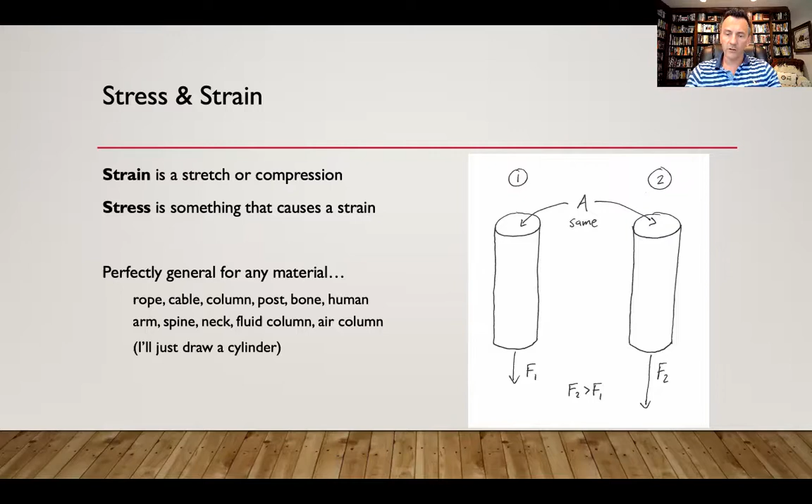So which of these ropes is going to stretch more? I think that it's pretty intuitive that rope number 2 is going to stretch more. We're pulling on it more. We're pulling harder. Therefore, it's going to stretch more. So we can interpret then that since there was more stretch, that means more strain, which must have been caused by more stress. So the more force we pull it with, the more stress we are applying.

Okay. Now, what about the areas? Let's say that now we keep the force the same on two different ropes. We're pulling equally on two different ropes, but the ropes have different cross-sectional areas. One rope is thick and one is thin. So rope 2 is the thicker one. And we pull on these two ropes with the same force. Which one's going to stretch more?

Again, I think intuitively we would agree that rope 1 would stretch more in this case because it is thinner. The thicker rope is going to be harder to stretch than the thinner rope. So if we pull on them equally, the thinner one should stretch more. So I can summarize that by saying that since rope 1 had more strain, then rope 1 must have experienced a greater stress. And so less area would lead to more stress for the same force.

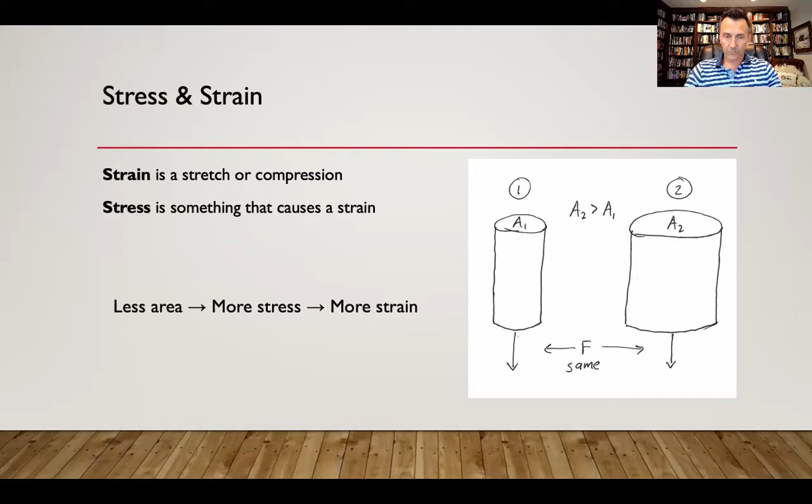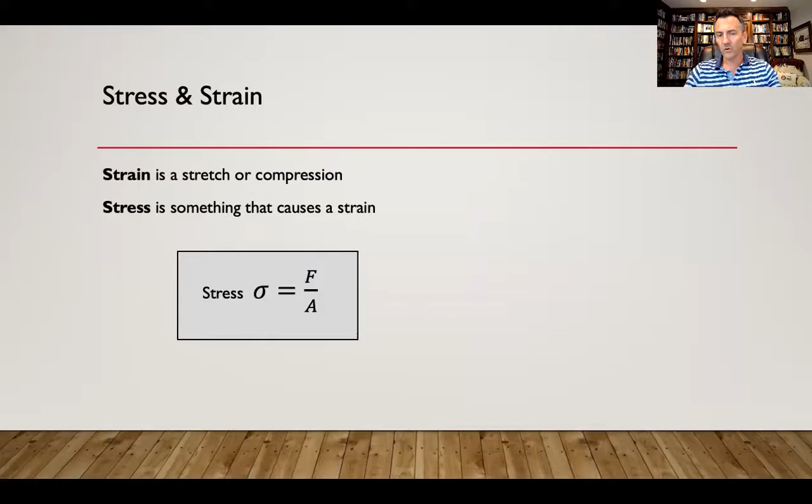So I can summarize all of that with a simple formula. Stress, which we represent with the Greek letter sigma, is force divided by area. Stress is directly proportional to force, so more force means more stress. Less force, less stress. It's inversely proportional to area because area is in the denominator, so more area makes the right-hand side smaller, which is going to make the left-hand side smaller. So more area, less stress. Less area, more stress.

And if we look at the units of this for just a second, so stress is force over area. Force could be measured in pounds, and area could be measured in square feet, for example. Or force could be in pounds and area could be in square inches. So stress would be measured in pounds per square inch or PSI. Or if we're using metric, force would be in newtons, area would be in meters squared, and a newton per meter squared is what we call a Pascal.

So you may recognize these units, Pascal and PSI. Maybe you recognize one or the other or both. And that's because these are the same units that we use for pressure. And the reason is that pressure is also defined as force per area. And so I'm going to come back to that in a minute and talk about what is the exact relationship between pressure and stress.

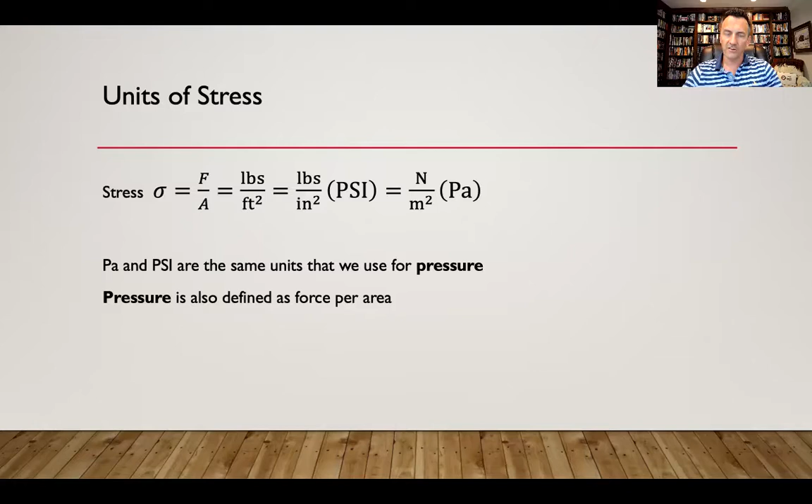Another concept that I'd like to talk about is this idea of energy density. Physics is, in my opinion, the study of energy. A lot of people think of physics as the study of force. And that's because that's the way introductory physics is usually taught. You start with force. But eventually in your physics education and physics career, you reach the point where you really think about things more in terms of energy than in terms of force. And I think that physics is the study of energy. So physicists love to talk about energy, and we're going to do that today too.

So this word density, though, let me start with that word. Density means, in our everyday language and in science, per volume, right? So when we talk about the density of an object, we're usually talking about the mass density. We're talking about how much mass per volume that object has. Something that's more dense has more mass and a smaller volume. Something that's less dense has less mass in that same volume.

We also sometimes talk about population density, and there we're talking about people per volume or people per area. And similarly, we can talk about energy density, which is energy per volume. So we're talking about how much energy is packed into a particular volume. That's the energy density. Higher energy density means more energy is packed into the volume.

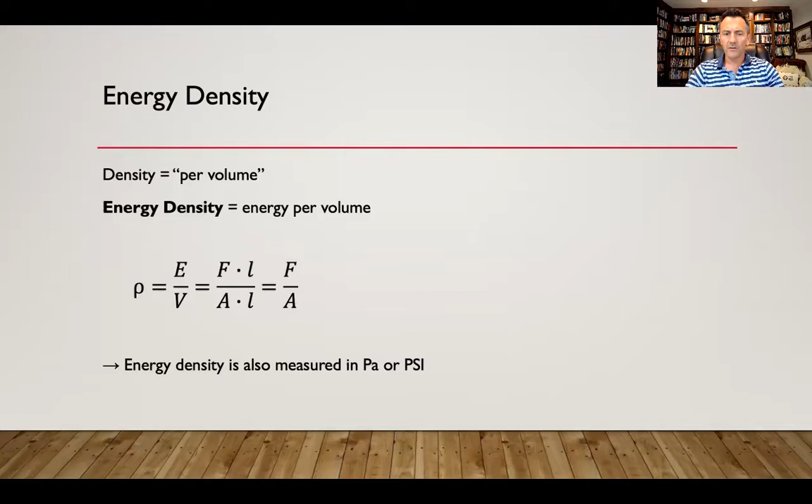Volume can be thought of as an area times a length. So I've replaced the volume with A times L. And you look at this fraction, you see that the L's cancel. And we're left with force per area, which we've seen before. So energy density is also measured in pascals or PSI.

And so what I'm getting at with all of this is that these are all different ways of expressing the same thing. Stress, pressure, energy density. Another one that physicists like is momentum flux per second. That's a little more complex. I'm not going to talk about that right now. But all four of these phrases are different ways of expressing the same thing. So the bottom line for this particular presentation is that when we talk about stress, we are talking about how much energy is packed into a volume.

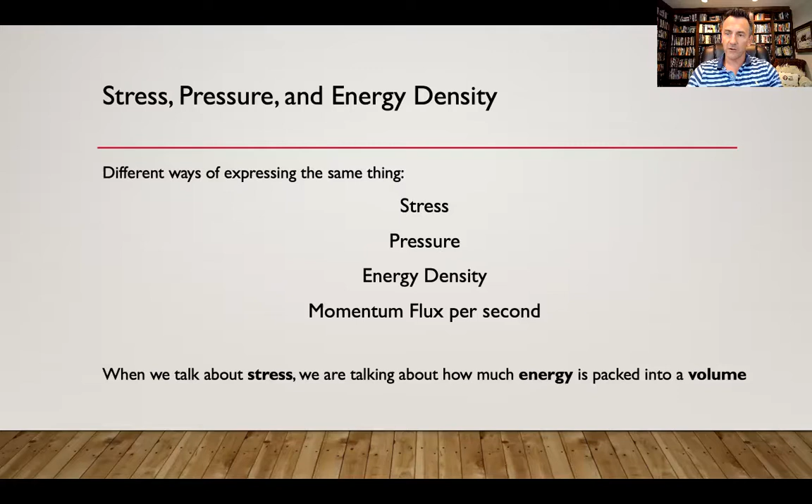So there's two types of stress. The first one is normal stress. And in this case, normal is used in the mathematical sense of the word normal, which means perpendicular. And in normal stress, the forces are perpendicular to one or more surfaces of the object. So here I've drawn the object as a cube. You'll see in a little bit why I chose a cube.

It's a very simple three-dimensional object, and we're talking about things in 3 dimensions. And also a cube serves as a nice kind of building block for more complex objects. We can think of complex objects as being composed of many small cubes all stacked together, kind of like Lego blocks. So let's focus on what happens to a single Lego block, and then we'll look at what happens to the entire object that's made out of these Lego blocks. So in the case of normal stress, we're applying forces perpendicular to the surfaces of the cube. Those could be pointing inward, which would cause the cube to get smaller, compressing the cube.

They could be pointing outward, in which case the cube would expand. That might be a case where you have, for example, a gas inside of a flexible container that's expanding. And you can possibly have both at the same time. So in my bottom right drawing there, I have that it's being compressed in the vertical direction, it's being stretched in the horizontal direction. So we have a stretch and a compression. It's kind of pancaking this thing. But these are all examples of normal stress, because the forces in all of these drawings, every force arrow is perpendicular to a surface of the cube.

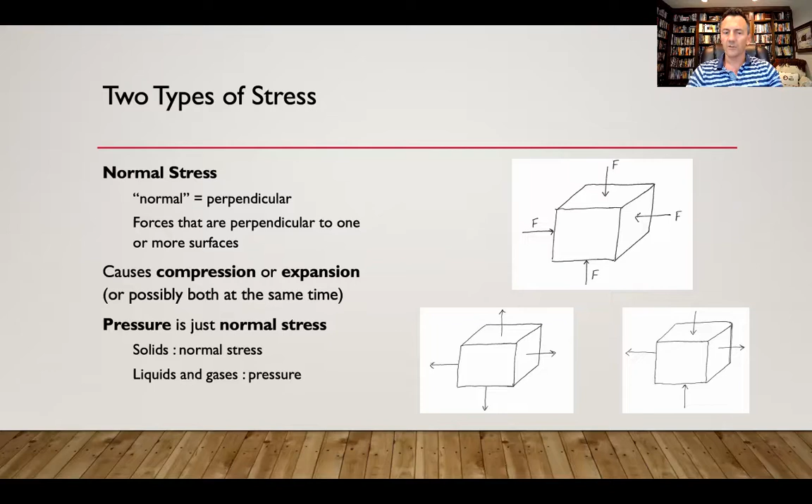And now I can tell you what the relationship is between pressure and stress. Pressure is just normal stress. They are the same thing. We use these two different terms basically to refer to two different states of matter. If we're talking about liquids and gases, we usually use the word pressure. If we're talking about solids, we usually use the word stress, normal stress. But they are basically interchangeable. And that's just convention that solids, we talk about it with one phrase, liquids and gases with another, but we can flip those two if we like. They really are the same thing, pressure and normal stress.

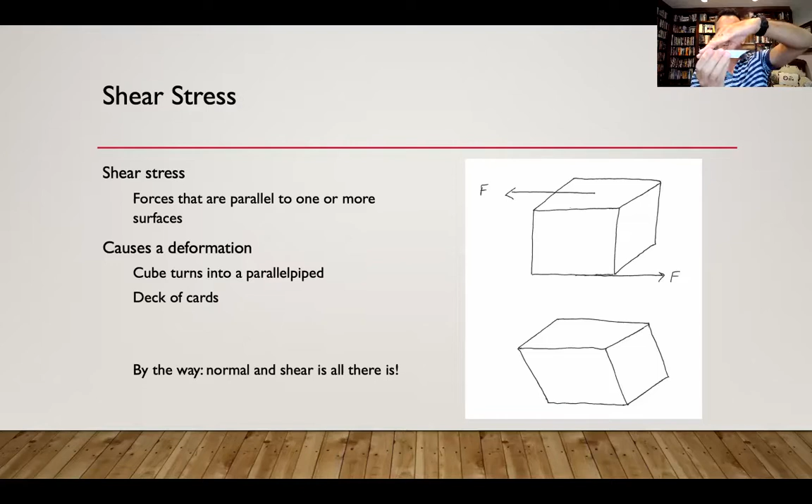So it's easy to demonstrate this with, for example, a deck of cards. So if I take a deck of cards and I apply a force sideways to the top, so parallel to this top card, and I'm going to go ahead and just kind of push them over like this, and this is what shear looks like. Okay, so we have something that's cubic or rectangular here, and we slide the top with a force. We apply a force on the top, and it's going to deform it like this.

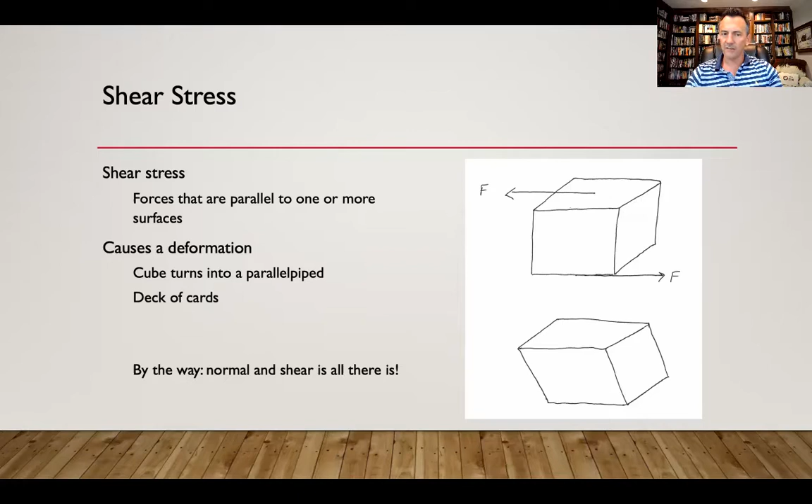Okay, so that's shear stress, and I just want to make this quick mention that normal and shear stresses are all that there is. Those are the only types of stress. And you may wonder, well, what about a force that is neither perpendicular nor parallel to a surface? Maybe it comes in at an angle. Well, that is both a shear and a normal stress. So there's a component of that stress that is going to cause it to shear, and there's also a component that's going to cause it to compress or expand. So it's both a normal and a shear. So we can think of all stresses as a combination of normal and/or shear stress.

I can also do this with a deck of cards. Again, the cards are not held together, but I can still kind of simulate this idea where I'm going to hold the bottom of the deck stationary while I turn the top of the deck. And so I'm twisting the top of the deck. And so I'm getting this torsion, this twist to the deck of cards.

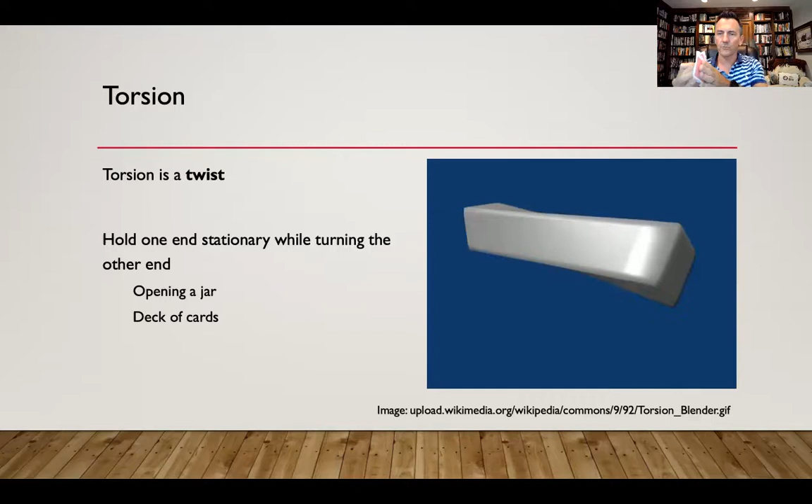So let's take a flexible cylinder and dice it up, divide it up into cubes. And so these cubes are serving as a visualization tool. We don't actually have to have a cylinder that's made of cubes. We're just doing this for purposes of understanding what's going on here. So we're using the cubes as a visualization tool. You can think of them, like I mentioned, they're like Lego blocks. These are flexible Lego blocks that have been stacked together to make up a cylinder.

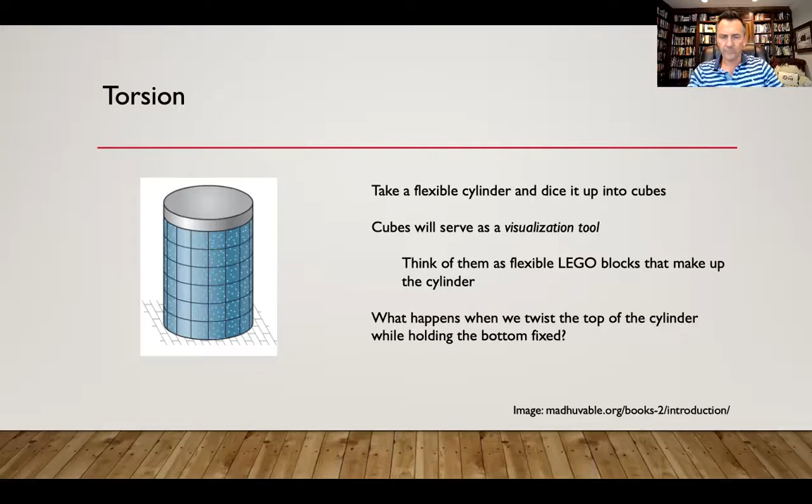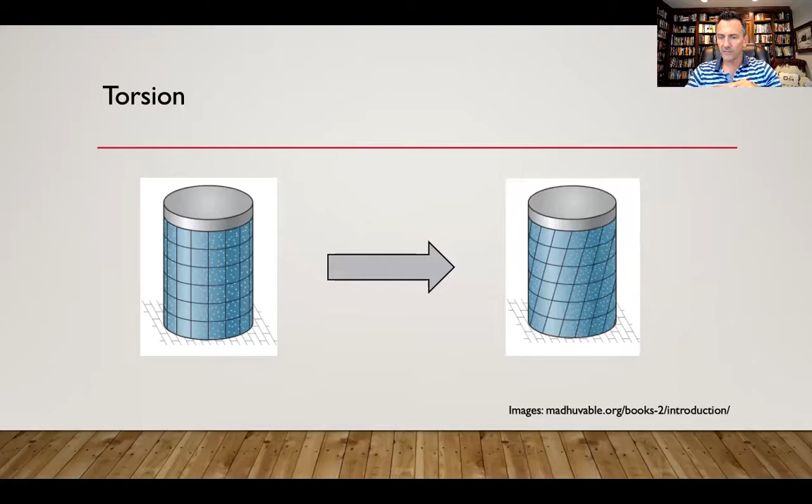So now what happens when we twist the top of the cylinder while holding the bottom fixed? Well, we get something that looks like this. And notice what's happening to the cubes. They are shearing, right? They are being deformed into parallelepipeds. So this is a shear force that this torsion is causing. So torsion causes a shear stress, and that's illustrated with these simple drawings.

To kind of summarize all of these physics concepts, when you apply a normal stress or a shear stress to an object, they can both increase the energy density within the object. And a torsion applies a shear stress. So the chain of reasoning down here is that a torsion causes a shear stress, which is another way of saying that the energy density in the object has increased. Okay, so how does this relate to the rear naked choke?

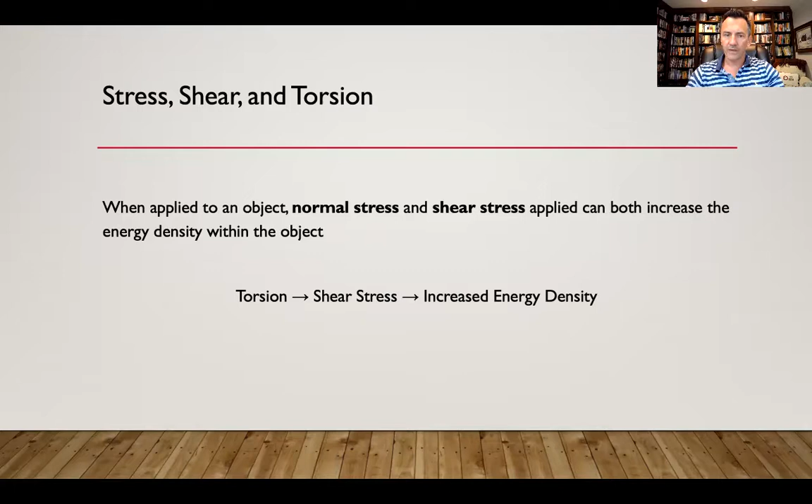First, let's talk about the purpose of the rear naked choke. The goal here is by wrapping the arm around someone's neck, you are applying pressure on the carotid sinus and on these baroreceptors that are on the carotid sinus, which signals the brain that the blood pressure needs to change, and that causes unconsciousness. It's very similar to fainting. Renee has written a really great blog article about all of this, so I recommend reading that for more details.

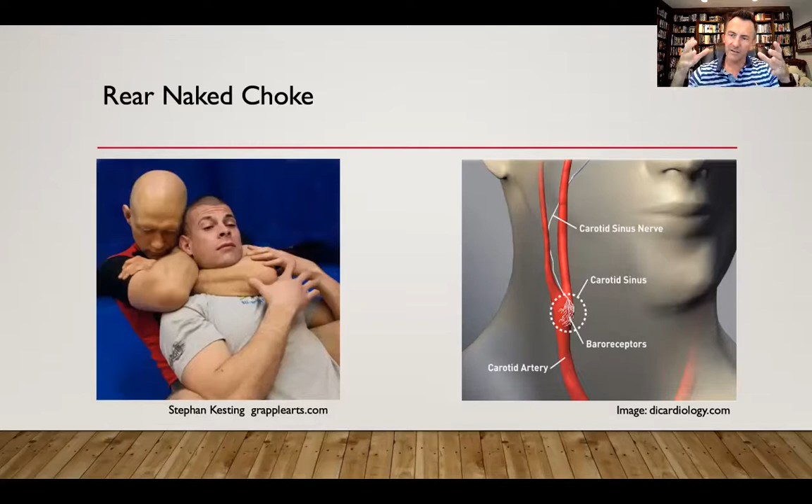But for our purposes right now, let's just note that the goal of a rear naked choke is to apply pressure to the carotid sinus. So in the traditional rear naked choke, that arm is wrapped around the neck and they squeeze. And so when they squeeze, what they're doing is they're causing a compression of the neck, right? And that is a normal stress or a pressure. Remember, those are the same thing. So by applying pressure to the carotid sinus, that is one way of performing the rear naked choke.

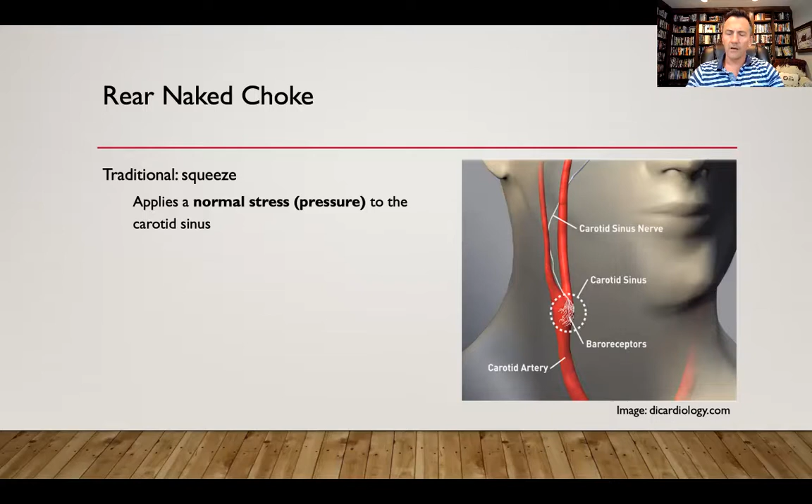An alternative is, as you saw in Rene's demonstration, that you don't have to squeeze. You can just twist. Why does that work? Well, based on what I've presented and argued so far, a torsion, a twist, is a shear stress. And a shear stress, like a normal stress, will increase the energy density in an area, in a volume. So whether you're using a normal stress or a shear stress, you're still applying that stress to increase the energy density in the target of the application.

And so the cylinder here, again, you can see that there's torsion. If you have your arm around the neck and you are twisting, down at the bottom, where the neck meets the shoulders, that part is not turning. So that's like the part of the jar that you're holding stationary. And then the twisting of the arm is where the rear naked choke is being applied up higher on the neck. And so you get this torsion, right? So it's like you're twisting the lid off of a jar. And that's going to apply a shear stress to the carotid sinus.

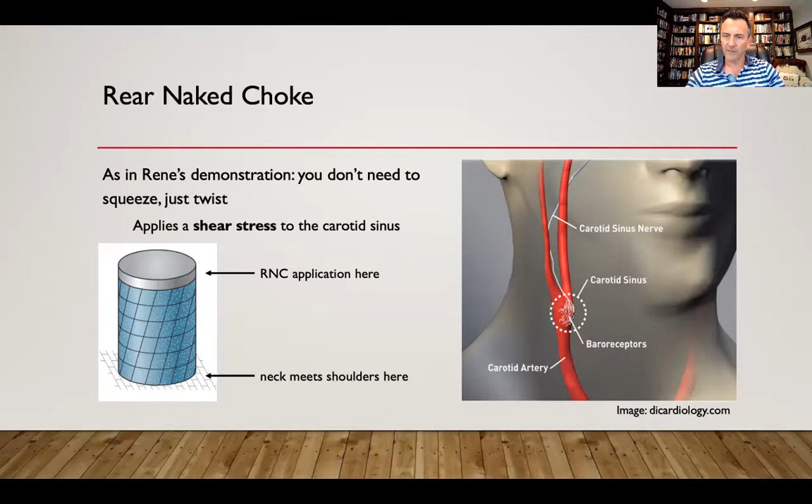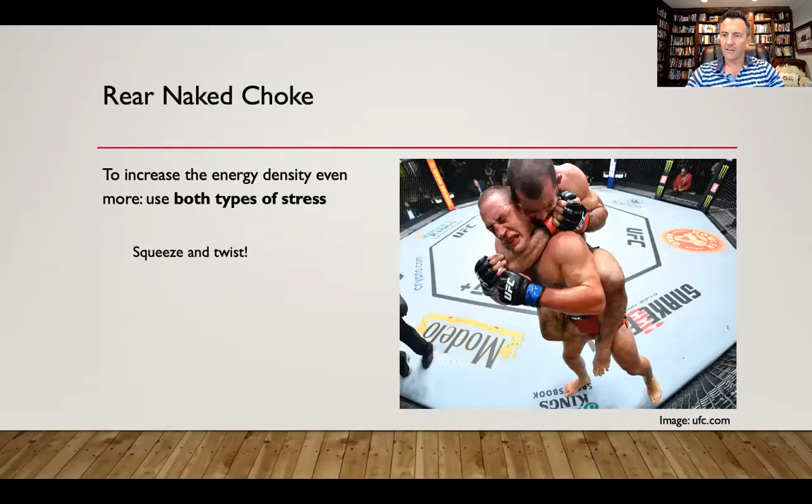So that's two ways of doing a rear naked choke. You can do it by squeezing, you can do it by twisting. And that's a little bit of the physics behind why those both work. And of course, if you want to maximize your effectiveness, you would use both types of stress. You apply both types, you both squeeze and you twist, which is happening in this picture. And you can see that it's definitely very unpleasant for this guy. So that was kind of a brief introduction to these physics concepts and how they apply to the rear naked choke.